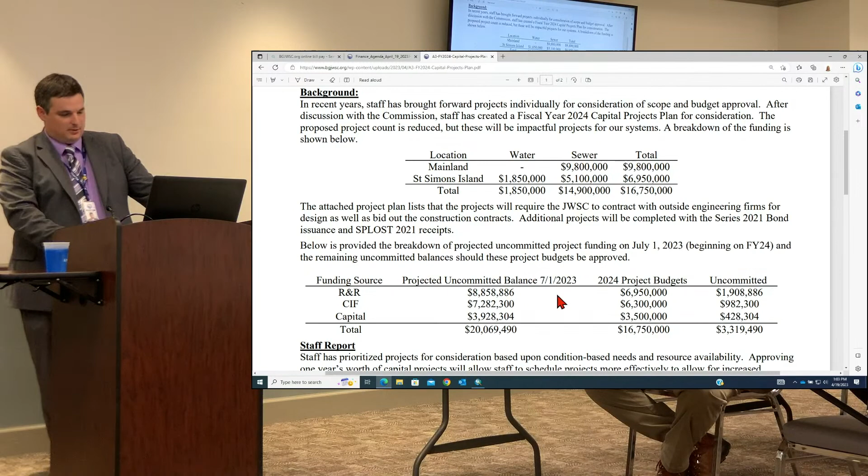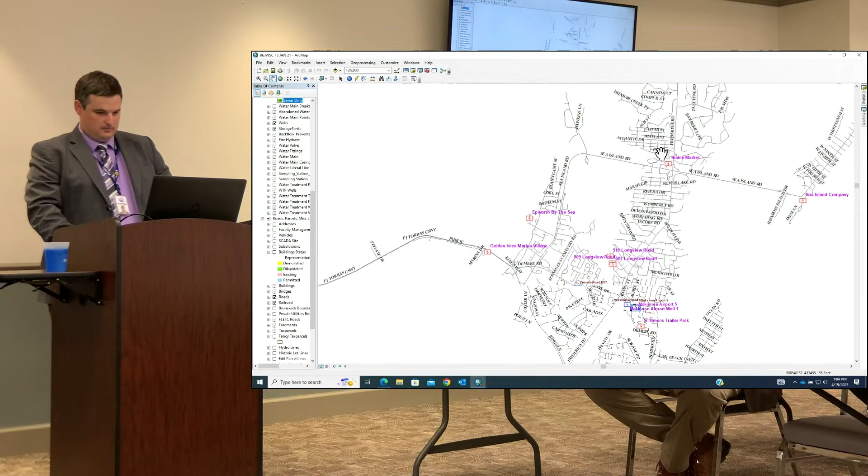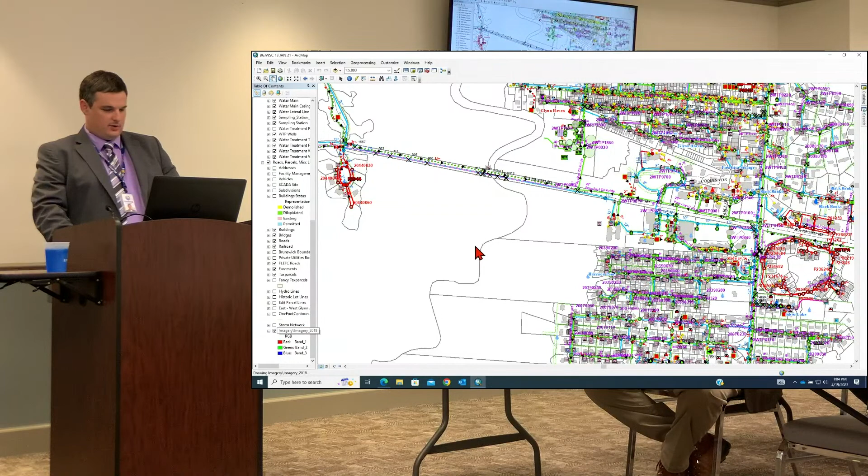The first project here, funded by the R&R, is Dunbar Creek Water Pollution Control Facility clarifier improvements. I've got GIS pulled up here so we can zoom in on these areas and discuss as necessary. I want to put these pictures on here so everybody knows where we're at. The plan for Dunbar Creek: we have an existing contract right now with a design build team working at the plant site to do improvements to the UV filters, aeration basins, and odor control at the facility. They are also making improvements to the roadway off of Sea Island so that becomes the main entrance.

The request here is to add a third clarifier to the Dunbar Creek plant for a couple of reasons. One, that allows us to do maintenance on the existing clarifiers—pulling it down to 1 clarifier is a struggle for us right now—and also, should the need arise, it will allow us to increase capacity at Dunbar Creek. But to do that is not just adding the clarifier; we will be filling in a portion of this pond to reroute the entrance road a bit, so that will allow for a full 80-foot diameter clarifier to be installed here. So that is all included together.

I have a question on the clarifier.

Somebody's having a good time.

Are the new ones significantly different in design than the older ones, or do they all function basically the same way?

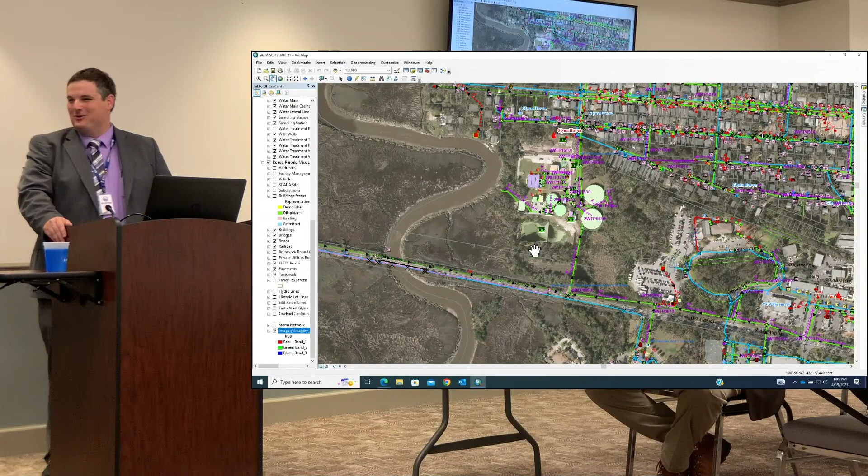I'll let the chairman add anything he wants, but I think the clarifier designs haven't changed a lot in the past 20 years. That clarifier is also necessary to increase capacity to 5 million gallons a day. Oh yeah, I know we need that.

All right, the second project is an R&R project called out in the master plan. It's keeping up with those master plan projects: pump station 2001 and 2002 rehab. When we do rehab projects for pump stations, we find we get better pricing and typically better interest in the project when we lump a couple of them together.

2001 is on Lord Avenue behind the village. It's a smaller pump station, but needs electrical replacement, safety grating at the wet wells, and some minor improvements. Pump station 2002 is on Arnold Road. We just replaced the force main there earlier this year. It also needs complete electrical replacement, new discharge piping and valves, and recoating the wet well for corrosion protection. Neither station will get an increase in capacity.

That's just rehab-based work. Are these ones we're engineering in-house? Pump station 2001 and 2002, we'll do the engineering in-house for everything but the electrical. We'll sub out the electrical engineering, but we have a standard electrical design now, so it should be mostly short-term to get that work done.

Harrington, Airport, and Mallory Water Production Facility are 3 of the 4 well sites on St. Simons Island. The master plan called out that they needed complete electrical replacements. The electrical there is 30 to 40 years old. There's a ceiling repair needed at Harrington, and we need a new finished water meter at Harrington.

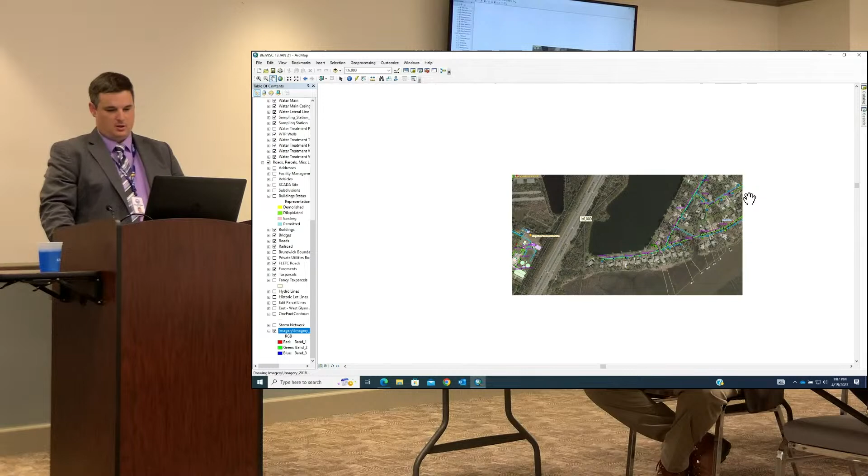Then 2 major projects at the end here. The capital project I was speaking about, proposing to use funding we haven't used before, is pump station 3103, located in the Royal Oaks subdivision at exit 29. Currently, pump station 3103, right here on the side of 17, pumps down 17 and then goes underneath I-95, discharging into a gravity line near the travel center. That station needs flow increases due to increased development upstream, both from commercial development and development at the Georgia Ports Authority. So we have multiple options on what we can do here.

What is currently being proposed, and will be considered as part of preliminary engineering when we send this out, is whether we increase the size of flow on the existing force main. Flow is currently limited on the force main, which I believe is a 6-inch force main. Or, we could reroute the force main through the Royal Oaks neighborhood and bore under the interstate again, coming into the plant, which would shorten the piping distance and reroute that flow off of pump station 3101, which currently has to repump all that flow.

A third option is a hybrid approach, which would continue to pump some of the flow the original way and pump half the flow back through the neighborhood, upgrading pump station 3104 as part of that and repumping from there. So those are the 3 options we can consider once we get an engineer selected, based on life cycle cost and upfront construction costs, to determine the best approach.

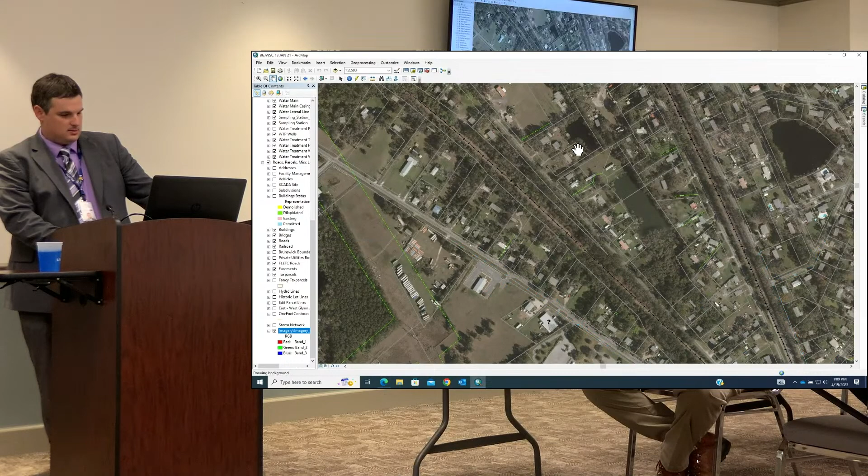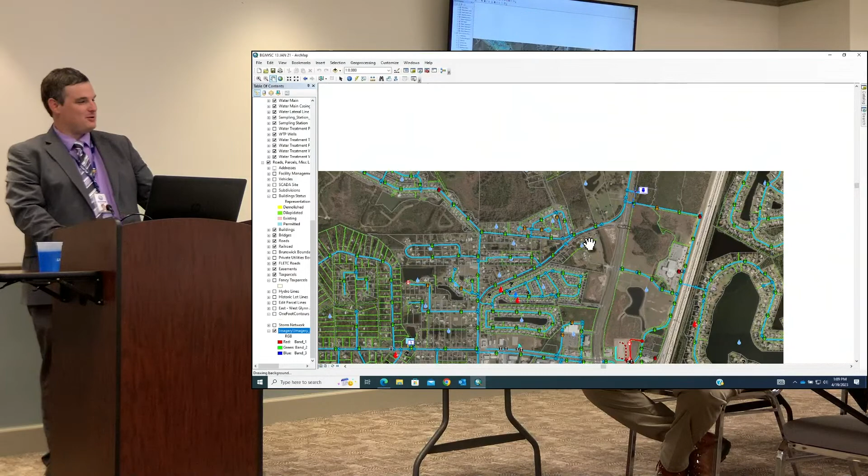It is located at the intersection of the spur and Highway 99. If you have driven down Highway 99 in recent years, you have seen an explosion in residential housing development along that corridor. We also know the proposed Buc-ee's installation will bring additional development.

Pump station 4119 is located right here. Currently, it has a force main that runs down to the existing Gateway Tract property owned by the Development Authority, then goes gravity underneath the interstate, flows through this very swampy area in the back, and then into pump station 4118, located at the end of Shell Road, across from the Morningstar facility.

It's then pumped down Shell Road to pump station 4110, which we just completed the major improvement project for that force main. What is being proposed, since we're force main limited in what we can do without significantly increasing the horsepower at the station, is to install a new force main bypassing this existing gravity line along the Highway 99 corridor, come back underneath the interstate, and tie in directly at pump station 4118.

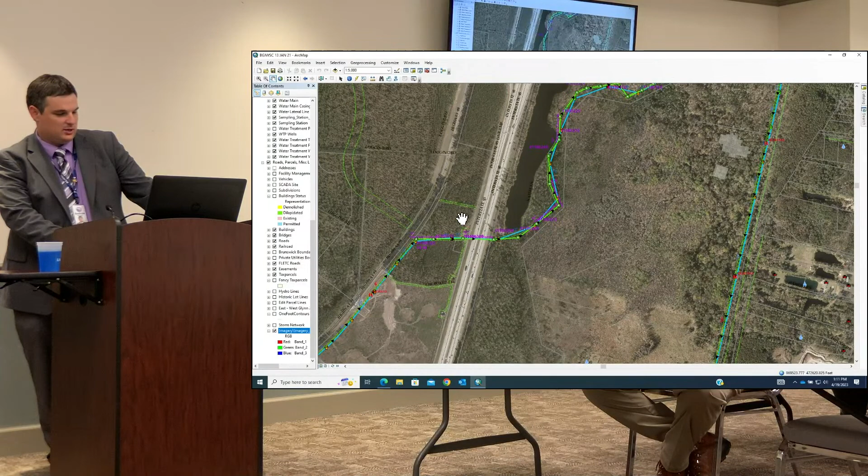Now, what that will do is two things. One, it will eliminate the need to use this smaller force main. It also opens up this gravity section to take additional flow from potential industrial development opportunities at the Gateway Tract, and Trade Winds, which are also development opportunities back here behind the proposed Buc-ee's.

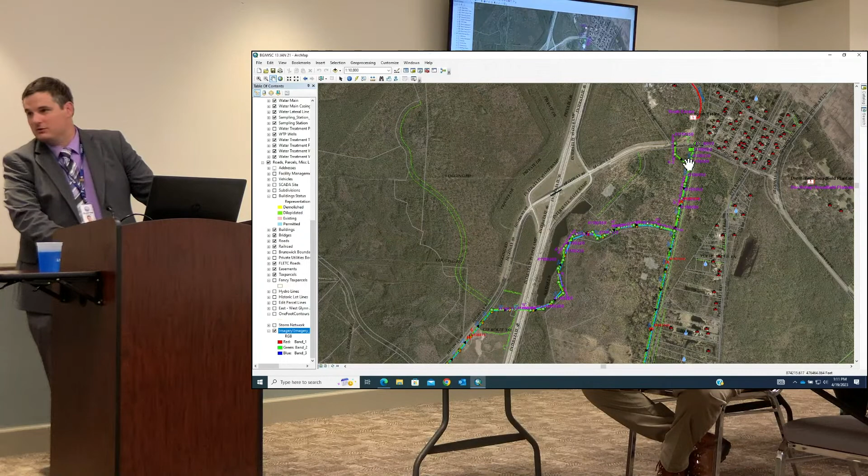But if we get the force main in the ground here, when we look at constructing the Exit 42 wastewater facility, which hopefully we'll begin engineering on in the near future in this northwest quadrant of Exit 42, the pipe that is put in the ground can be used to change the direction of pump station 4118 at a later date and pump back through it, so that flow can be taken off the Academy Creek plant and put to the new facility.

Now, that is a very expensive project. It is approximately the same amount of pipe that we installed with the SPLOST project from the North Mainland down Harry Driggers—a little bit smaller pipe, but about the same length. We'll also have to do improvements to the pump station to increase the flow. Currently there's about 950 gallons per minute of capacity, and we'll be going to 1,500 gallons per minute with this project. That will require extensive engineering as well.

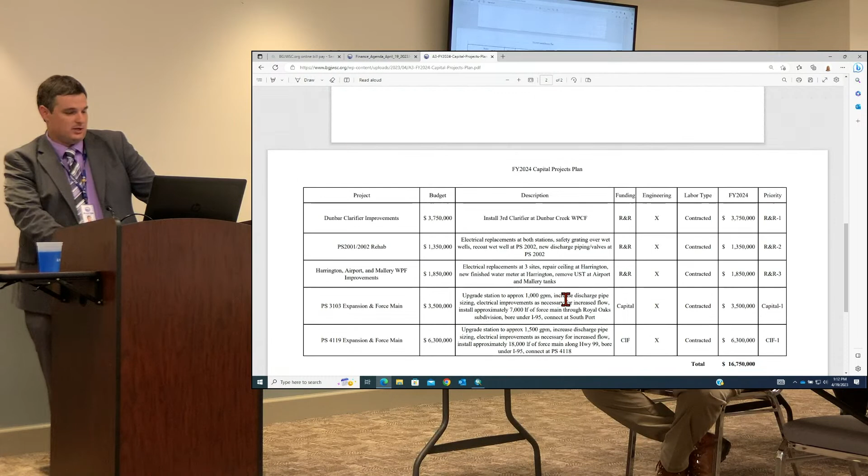So the only ones that will be completed in-house are the civil and mechanical design for pump stations 2001 and 2002. Mr. Chairman, I'll move the Facilities Committee recommend the full commission approve the fiscal year 2024 capital project plan as presented. I'll second the motion.

Motion seconded, any questions? I have a couple, if you don't mind. So Andrew, like the Dunbar clarifiers, I think of that as a construction project that you're going to hire some kind of general contractor to manage.

When I look at pump station 2001 and 2002, I really see kind of two different projects. One's an electrical scope and one's more of a mechanical/concrete scope. I wonder, on scopes like that, would it be more efficient to have two totally separate projects, even if they're not done at the same time? Because I see them as mutually exclusive, though I might be wrong based on the operations of the pump station.

I wonder if instead of hiring an electrical engineer to go out and design an electrical system basically for a pump, is that the most efficient use of dollars, or would we be better off approaching electrical contractors and having them do a design-bid, saying, do a replacement of this system for us, give us proposals on how you would do so. In my experience, local electrical contractors are very good at looking at electrical distribution systems and saying here's how we'd upgrade this, here's how we'd replace it, without going through the expense, the time, and the gold-plating that engineers like to do at times.

It could be done, we've never done that. We could consider doing that, and we'll have to confirm that we're following the appropriate bid laws to make sure that we can do that.

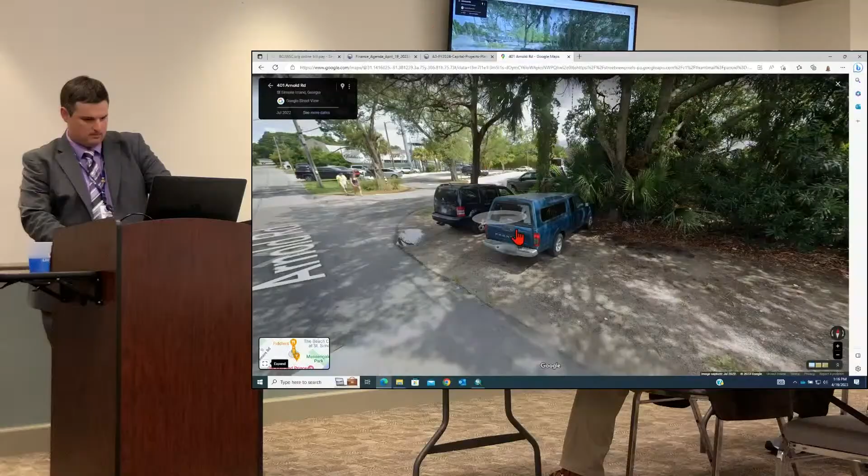Second and third, 2002, it's located on Arnold Road, right beside Fiddler's. It's on the same side as Fiddler's too, right? Yes sir. Well, there it is. It's a control panel and everything's raised there. Yes sir, because it's right there on the marsh.

I'll be honest, we've gotten multiple quotes in on pump stations, and electrical replacements on pump stations are going for $300,000 to $400,000 right now. It used to be that you could build a whole pump station for that - $250,000 to build it. Now you're looking at $300,000 to $400,000 just to replace the electrical. Wow.

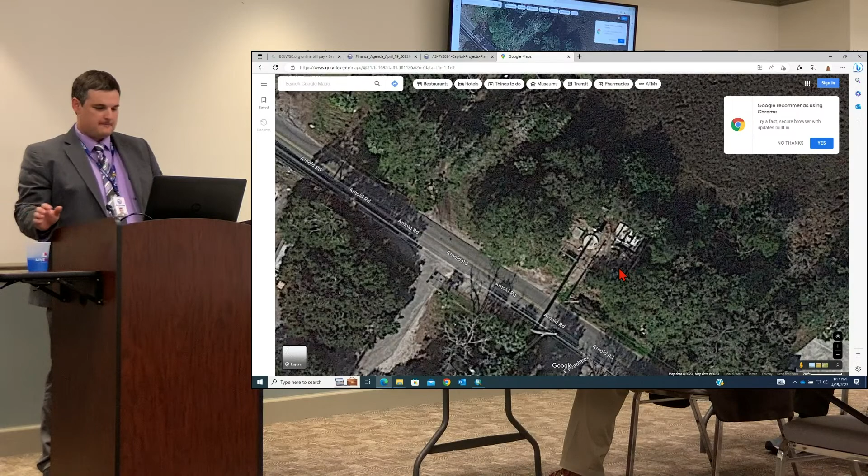Can you pull up the water production facilities? Sure. Airport well is right here. Explain to us what's gonna be done there.

We're going to basically go into this building and gut the electrical systems, according to the master plan inspections that were done by the electrical engineer. They've reached the end of their useful life. There will be complete replacement of motor control centers, breakers, VFDs, the whole nine yards on those pumps. And then there's an underground storage tank that will be removed - it's diesel storage for the generator. The generators we're getting through the FEMA contract have belly tanks on them, so we no longer need that. When you have an underground storage tank, if it's over a certain quantity - it's a very small quantity - you essentially have to do the same testing that a gas station has to do every so often to make sure the tanks are not leaking.

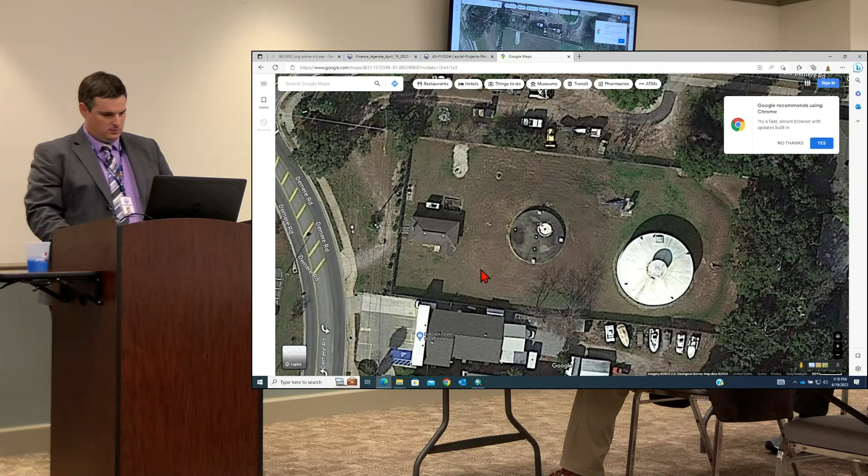Point out where the wells are there, Andrew, and explain what we've got there. All right, this picture is terrible. So this is the ground storage tank, that's the air stack aerator on top, a plate aerator where we drop across. Well facility here, and then the remote well.

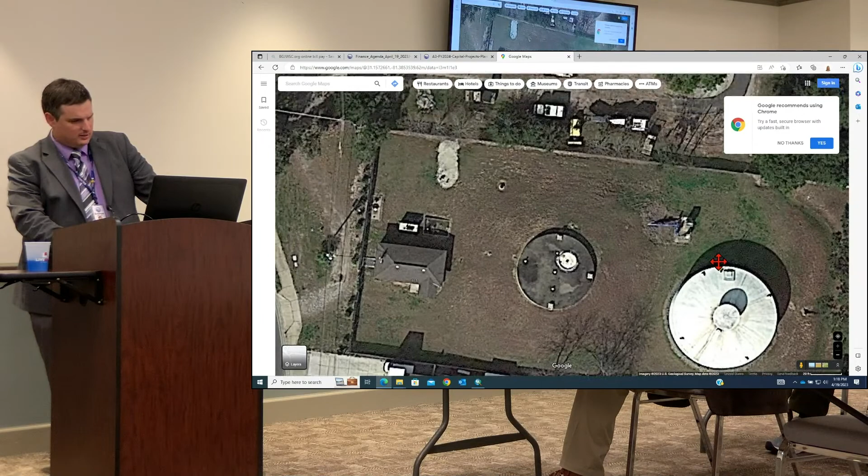Do you know where it's at? Yeah, it's on the other side, up where they have the little farmer's garden kind of thing. Ah, yes. There's a remote well facility here, so we actually have 2 wells that pump to this facility.

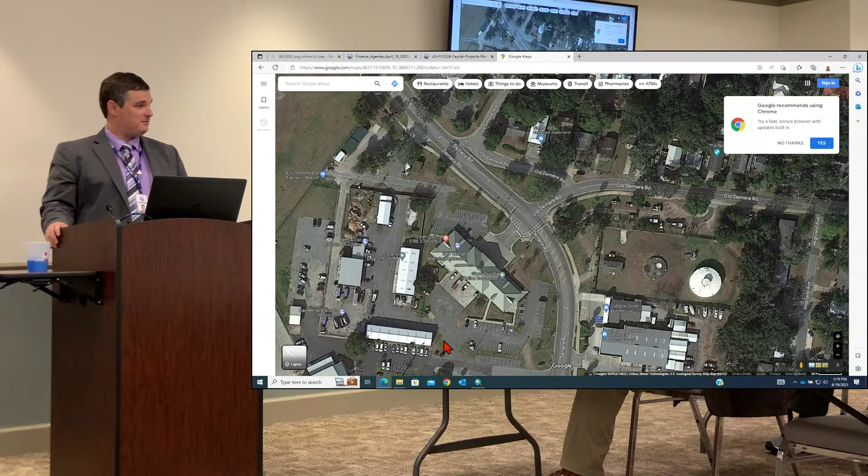So this is one of the older well sites we have currently in use. I believe it was put in the 40s or 50s, so it's a small tank.

Mallery Street well - well, not too far, I'll get there in a minute. Demere - I went too far again. There we go.

Right here, right there on the side of the road. There it is, same setup, much smaller footprint. Ground storage tank, pump building with electrical.

We'll be gutting the electrical here too, also removing an underground storage tank for the fuel. And the last one is the Harrington facility.

Go back to Mallery. Yes, sir, it's right in the neighborhood. And that tank has always got mold on it. We're looking at ways we can use some type of additive to the paint that prevents that from occurring. We have pressure washed it repeatedly, and then within a month it's right back to where it was at.

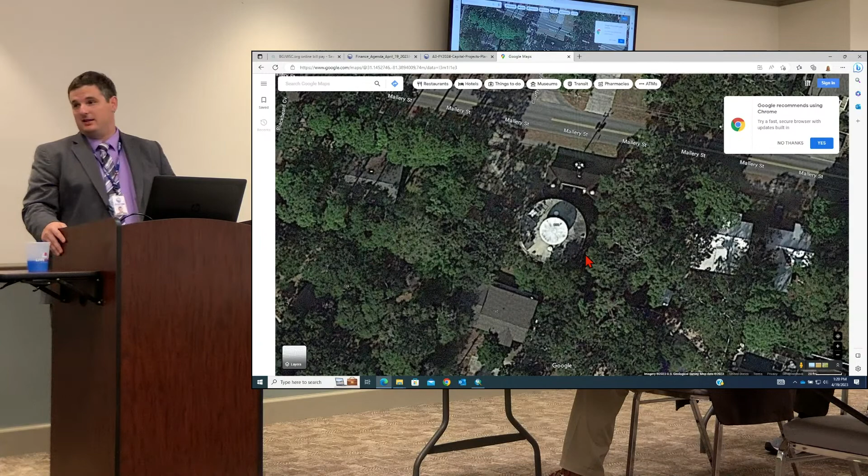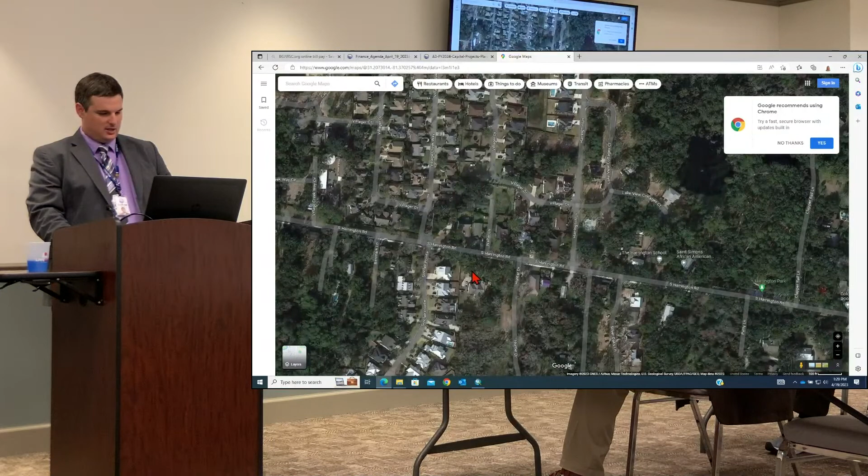And then the Harrington facility is immediately adjacent to where Derek Simmons and the water distribution crews work out of. So this is Derek's building here.

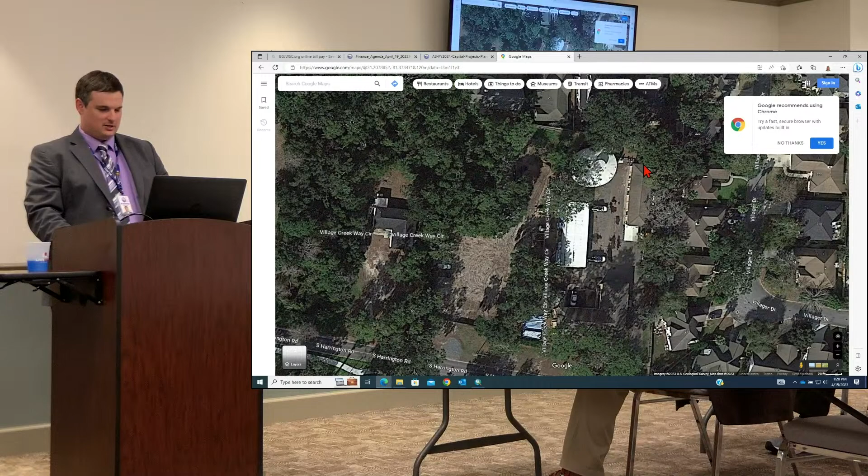This is Derek's building here. This is the warehouse, and this is the ground storage tank for the Harrington facility. And this is the pumping building. It's got the high service pumps and the electrical panels.

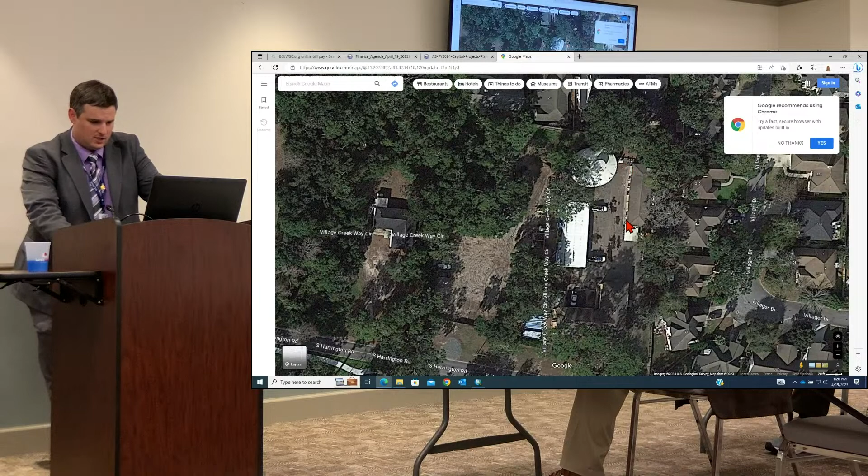There's a ceiling repair that needs to be done in there. And so this one's right there off of South Harrington. Again, these were listed as high priority projects in the master plan in the first 5 years of that.

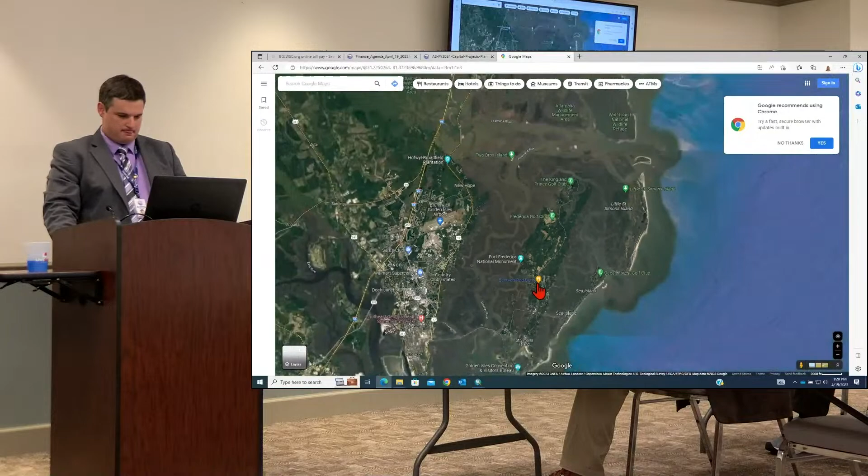So you showed us the force main and showed us those. Yes, so the 3103 and 4119 projects are expansion-driven projects. We've got a lot of increased growth in those areas, residential and commercial, and then also at the port.

At exit 29, these are good projects where we're not just putting in enough capacity for immediate needs, we're putting in a little extra to allow a buffer, and that will serve us well for many years to come.

Are there any other questions? Hearing none, all in favor? We can go ahead and vote. Okay, 2-0. Motion carries.

Next item is the Dunbar Creek Water Pollution Control Facility Change Order Number 2.

Mr. Burrs? Yes, sir. As I updated you a couple of months ago, at the Dunbar Creek facility, the 30-inch influent sewer collapsed between the manhole and the influent wet well.

We had a small section collapse previously that we change ordered to BRW for $101,702.69. Another section of the line collapsed, so we made the recommendation to go ahead and replace all of that pipe moving in, which has been completed.

With the design build process, we get open book pricing where they provide backup receipts for every dollar that is spent, plus we have a guaranteed markup rate for the overhead and markup rate that they put on it.

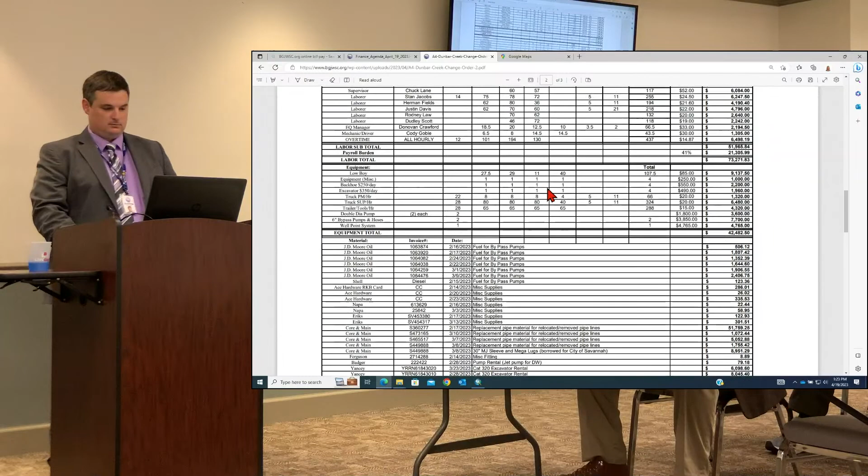Can I have a motion? I'll move the Facilities Committee recommend the full commission approve change order number 2 in the amount of $340,049.48 to BRW Construction Group LLC for scope changes associated with the Dunbar Creek Water Pollution Control Facility Rehab Project. I'll second. Motion seconded. Any questions?

Drew, I noticed there's a lot of equipment rentals on here and stuff, just a general comment that I think we should go back annually and look at total equipment rental that we do, and then see if there's opportunities where we would've been better off just buying equipment, housing it, and having it available even if it's for contractor use. Not that we want to get into the equipment rental business, but if we're renting pumps consecutively at a cost annually of what we could've bought a pump for.

Sure. And then ultimately we get the benefit of having that available for our emergencies as well. Yes, sir.

Any other questions, comments? Hearing none, all in favor? Motion carries 3-0.

Next item is contract awards, plus exit 29 water pollution, water production facility and elevated storage tank engineering. Mr. Burrs?

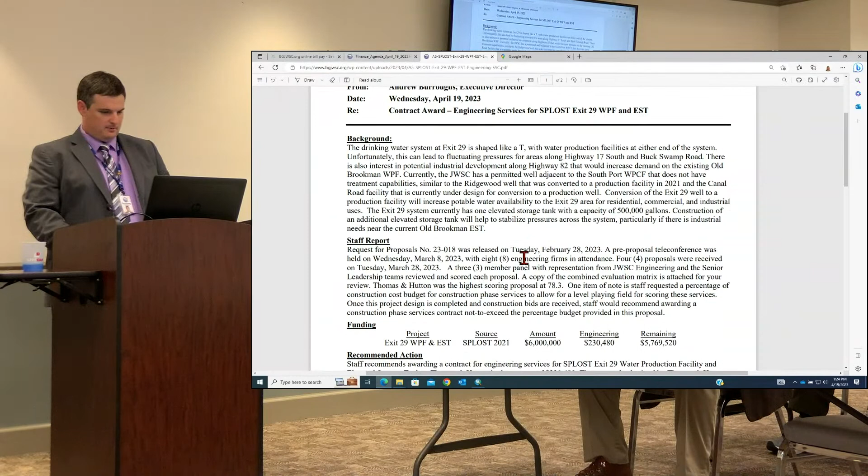Yes, sir. As you are aware, SPLOST 21 collections began April 1st. So we put out an RFP, February 28th, and collected proposals March 28th. We had 4 proposals received.

We had a 3-member panel score the proposals from both engineering and senior leadership. Of the 4 proposals, the highest scoring firm was Thomas & Hutton with an average score proposal of 78.3.

One thing we've done differently here compared to our traditional engineering contract was, instead of asking for a hard dollar budget for construction phase services for inspection and construction administration, we asked for a percentage of construction cost budget. So that is not being awarded at this time.

The request is to award the design budget, and then once the project is bid out, we will come back to you with a proposal from them not to exceed the amount budgeted here in the proposals received for that construction phase services.

The SPLOST 2021 budget for this project, which is to convert a well site into a production facility and install a 500,000 gallon elevated storage facility at exit 29, is originally budgeted at $6 million. The engineering design is $230,480. You see the scoring sheet here, which we'll go over shortly.

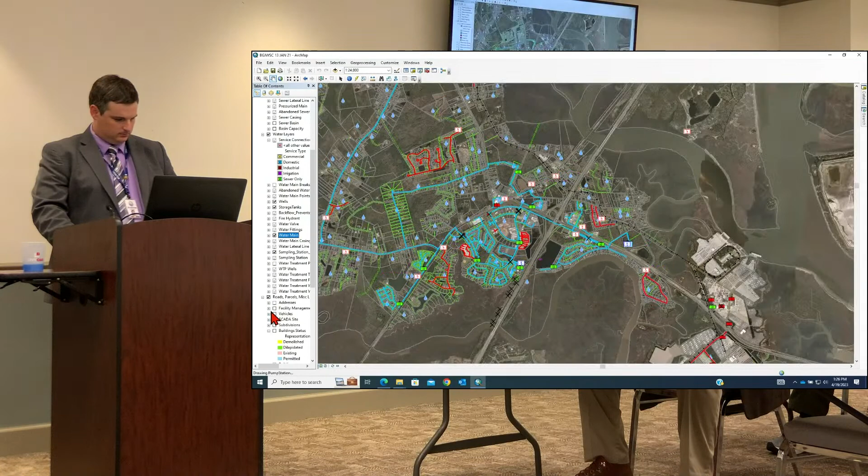But let me explain the real reason we need to do this project. Let's see, water main... One thing you will notice on this system, we currently have 3 wells on the permit.

2 of them are in use currently. With the old Brookman well up here at the very far end of our system, there's an elevated storage tank. The other well that we currently use is the Fancy Bluff well, out across from Royal Oaks, that we just talked about with pump station 3103. So the well sites we have currently in use are at either end of the system.

The exit 29 well that would be converted is currently, the well has been examined. It will function. We just need to add treatment capacity, ground storage tank, and chemicals there. It's right here on a property adjacent to the existing exit 29 wastewater treatment facility.

We have intermittent pressure issues in neighborhoods around Clearwater and also along Buck Swamp Road for some of these neighborhoods, because all the water is being pushed from either end of the T up here, and this end is kind of left in the middle. So the hope here is to construct an elevated storage tank adjacent to the well site, which will help stabilize pressures in this general region.

Another thing to keep in mind, the Development Authority now owns the old Dean's Island tract, which is a 1,200 acre industrial site that they are marketing for industrial use. The old Brookman facility, which is the only current elevated storage tank at exit 29, is stubbed out to the property line at Dean's Island.

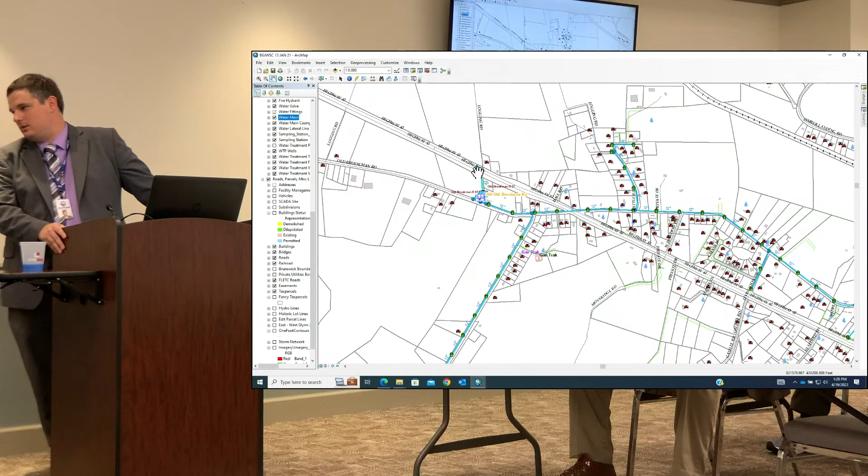So if something were to come in there, which we are hopefully getting interest in with the Hyundai suppliers and types that are coming into our region, that would put a tremendous strain on the old Brookman tank to maintain pressures throughout the rest of the system.

So this is a good planning project for us, and then we'll have an elevated storage tank here adjacent to the wastewater plant that's kind of bookending our county. When you come into Glynn County, we'll have a water tank on one end. We have the other project to put a water tank at exit 42. It'd be a good signpost for us to say that we're open for business in Glynn County.

Let's see here, scoring, we did a little differently this time. We asked for a little more detailed information to try to make sure we were getting to the right conclusion. So we asked for 2 similar projects, including the conceptual layouts for the projects that were completed. We asked for projects that had been designed and constructed and were in use. We also had references provided outside of that, we called references and actually interviewed the people that had worked with the engineers before.

We scored them based off of 6 key team members for the project, and each individual team member got a score. We asked for detailed information on their approach to managing the budget and cost estimation, which we know right now is somewhat a shot in the dark, but we wanted to know their experiences and how they proposed to handle escalating costs.

How they ensured quality assurance and quality control of their projects so that we don't have errors that end up occurring and having to be corrected in the field.

Project timelines is a major concern. We know that a lot of our projects are behind schedule right now. We want to make sure this project, being a SPLOST project, stays on time.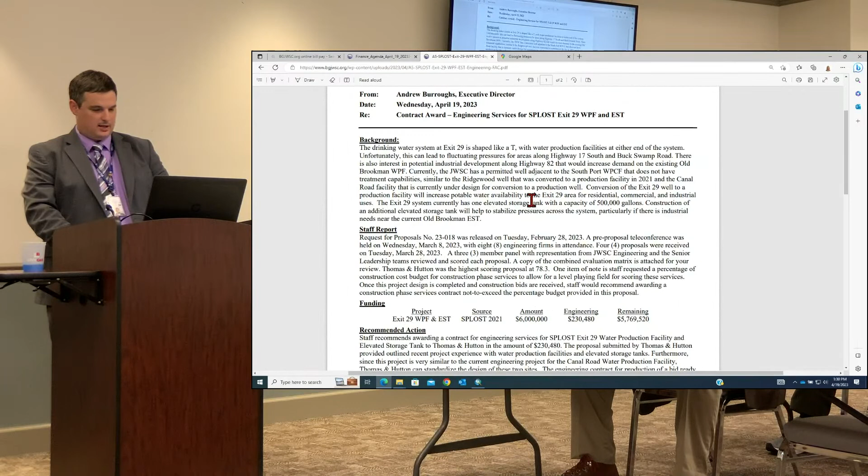So the highest scoring proposal was Thomas & Hutton. Thomas & Hutton is doing the design on the Canal Road facility that is currently under design. It's a very similar project. The only difference with this project is the design of the elevated storage tank.

They did have recent project experience designing elevated storage tanks. They've got the project experience with the Canal Road well. And we expect this to be a quicker project than some of the other ones because a lot of the similar design principles can be used. It looks like they were the cheapest too. They were, yes sir.

Can I have a motion? I'll move that the Facilities Committee recommend that the full commission award a contract in the amount of $230,480 to Thomas & Hutton for engineering services for the SPLOST Exit 29 water production facility and elevated storage tank project. I'll second.

Motion is seconded. Any questions? I have a couple of questions. I think one of the things is, we sit here and deal with a lot of technical things, but if you were an outside person, just a customer, a project like this, the SPLOST project, allows us to push this ahead of where it would normally be in our rotation.

Is that correct? Yes, sir. For us to fund a $6 million project, you're not going to fund many of those in a budget. So this is a good project for the community to increase water availability in the Exit 29 area and also stabilize pressures, which is a big deal for folks.

And I think that's important because most people, end users, turn on the tap and they don't think about any of the process that goes on. So it's very important, I think, that people realize the thought and planning that's gone into this.

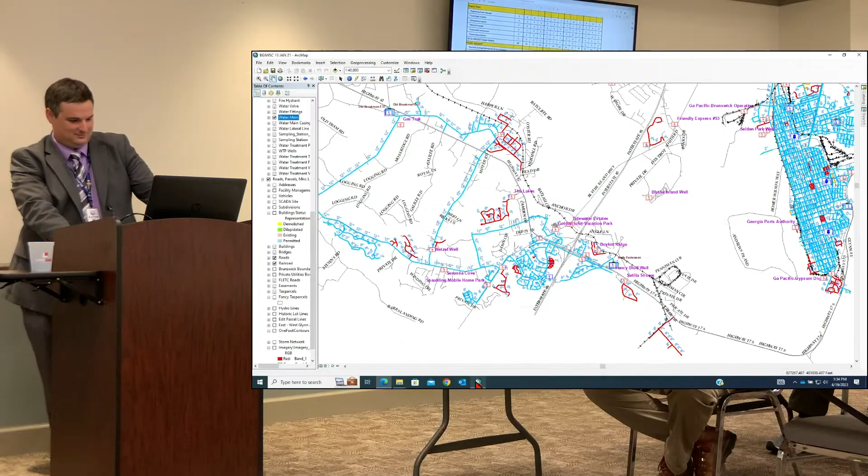None of that should be an issue on this project. Can you pull up the Southport wastewater plant and show us where the well is? Sure, on Google Earth so we can talk about something. Y'all know where the Southport plant is?

This is the Southport plant adjacent to I-95. Barely see it from the interstate. Show us where the well is. The well is right here. And where is the elevated tank gonna go?

We have two options for the elevated tank. We can either locate it here on the wastewater site, right beside the wastewater plant and the elevated storage tank, or there may be an avenue to locate it over here in this area. There are some wetlands in this area, but we think we can probably get it in over there. So we've got two options, with similar benefits to both locations.

We own this property here all the way back out to Southport Parkway. We're looking at rerouting a force main through here already, so it may get a little crowded. We're going to try to make it work over here, but if not, we'll have plenty of space to put it in over here.

But visible from the interstate? Either way, it's going to be adjacent to the interstate. Right.

And that well, will it require a well house too, or just a very small well house? It'll be very similar to what we put in at Ridgewood. The building would be very similar to what we're going to get here.

It has to be that even though we have a big control building at the wastewater plant? I think we want to separate all that. The water people don't like working with the sewage, exactly.

I will say, as a compliment, 100% compliment to the wastewater plant here - this is an elementary school, Satilla Marsh Elementary. I was there a couple weeks ago chatting with somebody about a STEM opportunity, and they were talking about STEM for children, and I said we could even get you a tour of the wastewater plant.

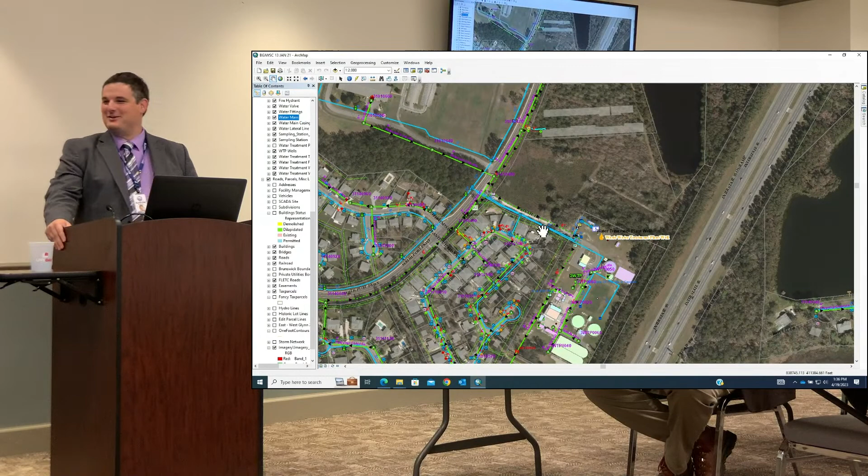Well, this is the entrance - there's a U-shaped entrance to the facility here for the school. This is the entrance to the wastewater plant. Nobody I talked to actually knew there was a wastewater plant back there. And that's the highest compliment you can give a wastewater plant - that I didn't know it was there. So well done by the facility there, making sure nobody knows that they're back there.

Now, is that gonna require a line going underneath the highway eventually? No, sir, we could eventually do that, but we weren't planning on that.

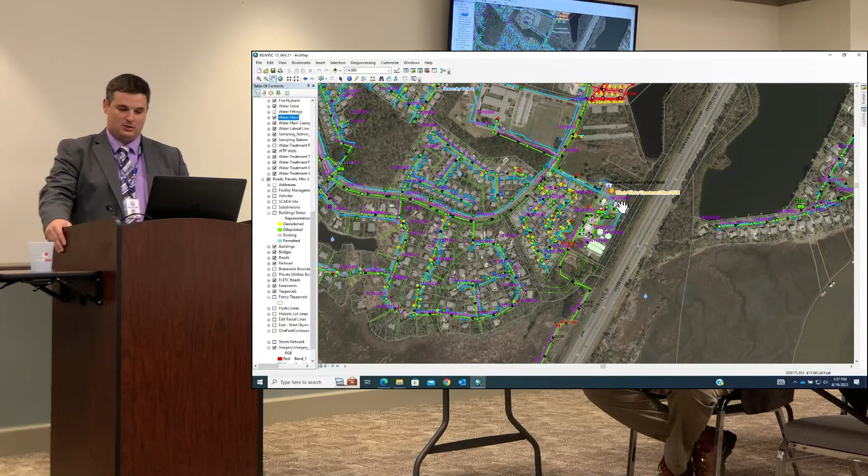We were also going to loop in these neighborhoods here because they're single fed. So we were going to try to loop in some of these neighborhoods to the tank as well. But on that pump station we're talking about, we could put two casings in at the same time, get it together and be ready to go. Yes, sir, it's a really good idea.

Did they say how long it's gonna take them to do the work? Trying to be cognizant of everybody's workload, we allowed a time of up to 330 days for design for a bid-ready package. Thomas & Hutton assures us they will be done much sooner than that because they can use similar designs of what they've already got working.

Any other questions? I will say, once this goes to construction, you're probably looking at 18 months to get this project constructed because of the elevated storage tank.

Any other questions? All in favor? Motion carries 3-0.

Next item is contract award for Highway 341 Crispin Boulevard repairs.

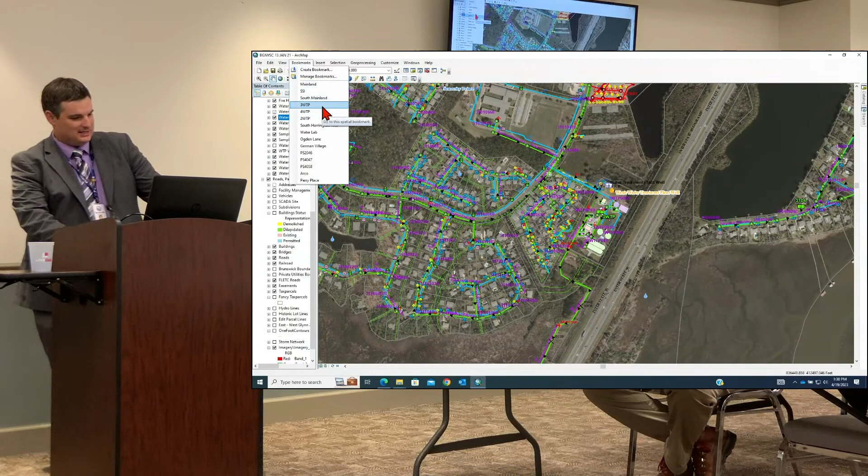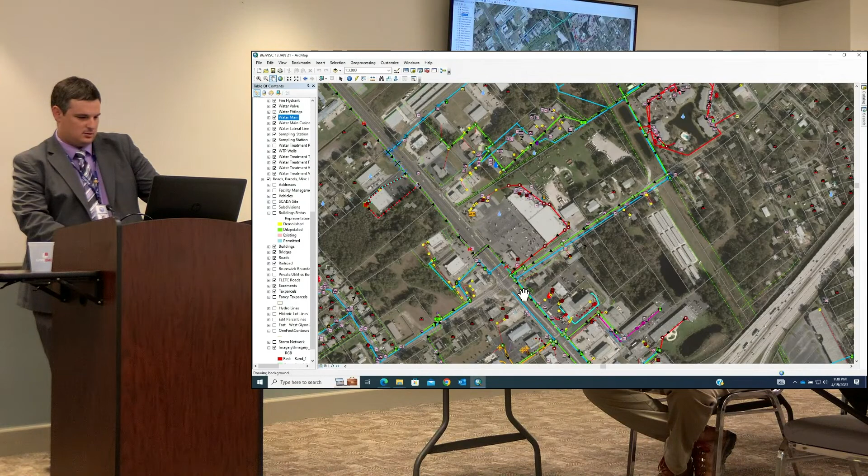Let me orient us here on Highway 341 in Crispin. If you've driven the Highway 341 Crispin area, you have undoubtedly seen road plates up there. There has been a partial collapse of a sewer main. The line is still flowing, right here at this intersection. The Google car was in town, so this section between this manhole and this manhole has a partial collapse of this line that is flowing.

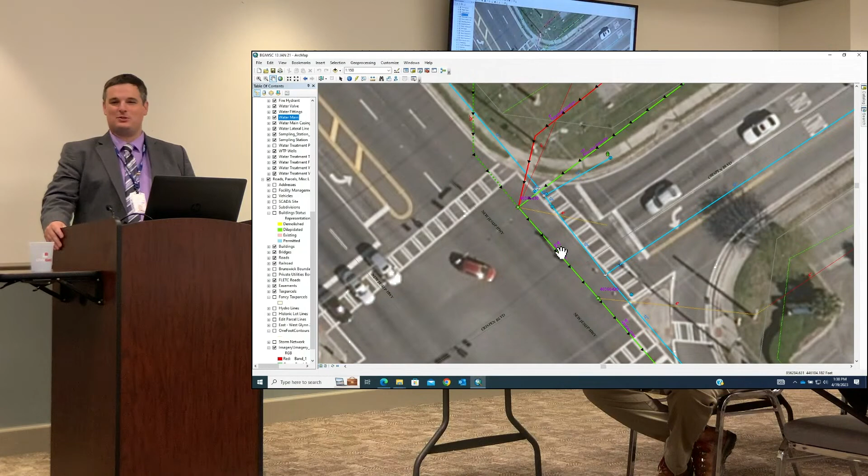To make matters substantially more complicated, this is in the travel lane of Highway 341. There are two 36-inch RCP storm sewer lines across the top of this pipe, and two force mains that come into this manhole. This is one of the most challenging sections of pipe we have to deal with in our system.

We have contacted multiple construction firms asking for pricing, and we have finally received 2 proposals. 5 people declined to give us a proposal, indicating that was not something they were interested in taking on right now. It's a 60-foot section of 18-inch ductile iron piping, with force main discharge and extensive traffic control required. The 2 proposals submitted are essentially the same proposal because the work will have to be done.

The work we're going to get done trenchlessly to avoid having to support those 36-inch RCP lines. But to do that, you have to dig down and get entry pits and also do bypassing, traffic control, and everything. So there's a CIPP contractor and there's a standard civil contractor.

We got proposals from both of them, so the decision here was simply who's going to be the prime contractor. We decided to move forward with Popco Inc. as the prime contractor at $679,000. The proposal from Bionomics included an additional management fee for them to manage the project, so we're avoiding that cost. This is a substantially higher price than what we would typically pay to repair a 60-foot section of pipe.

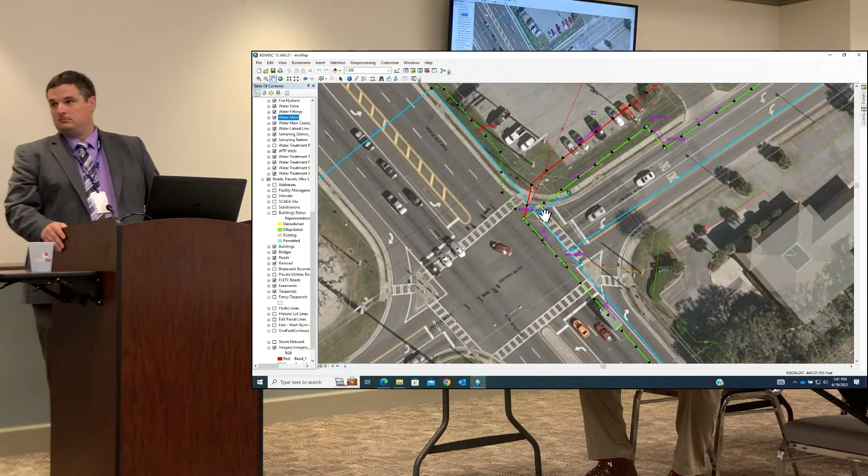And likely a single lane closure on 341. So we're replacing a manhole? No, sir. We are, but the manhole has two force mains coming into it. What we're going to do is, we will be rehabbing that manhole once we get it together. We're likely going to have to remove a couple of the upper sections of the manholes to make sure we can get in there and do the work properly.

Pointing the area, bypassing is going to be an extreme challenge. And then traffic control is also much more expensive than would typically be required. We have talked to GDOT, and we are going to be required to pave 50 feet in every direction of the section. So the paving cost is also much higher than what you would typically see for a standard sewer repair of 60 feet.

They know what we're going to be doing and they've given us the permit? They haven't given us the permit, but they're aware of the situation, yes, sir. And they are very much pushing us to get this corrected.

So it's an emergency. Sounds like it's only going to take 30 to 45 days for completion, right? Once you add 30 to 45 days for completion, they ask for at least 2 weeks to mobilize, so we're looking closer to 60 days probably for final completion.

The bypassing, is that rented equipment, or is that theirs? Well, I don't know if they're renting it or bringing it. It's there with their equipment. Whether they're renting it or not, I'm not sure.

Again, I just want to point out, if we've got that kind of stuff that we own, and $115,000, I realize there's probably labor in there too, and a lot of that is labor. But if half of that, just making up a number, is equipment, that's a big down payment on us owning the equipment. And my perception at least is that we have a lot of those things we're renting, and there's no doubt we can't build a church for Easter Sunday, but at least if we had a core group of equipment that we owned and could provide the contractors to do our own bypassing, it would help us have that equipment for when we needed it, and help pay for the equipment when we needed it versus going to a rental company.

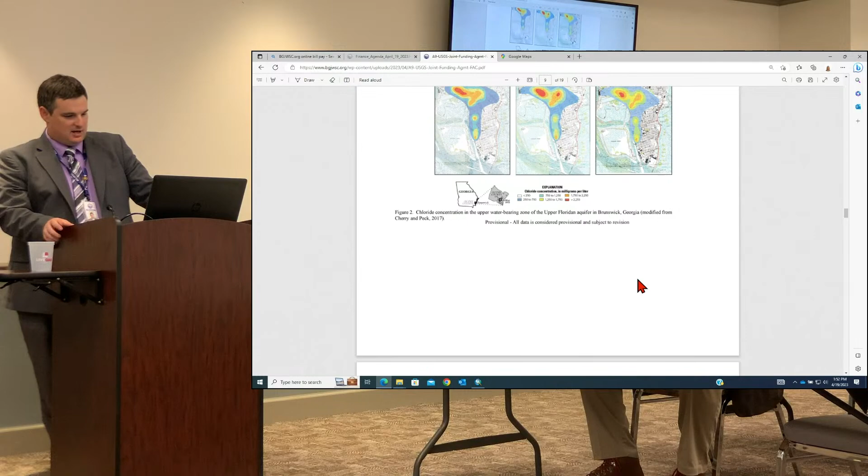But you can see the monitoring wells and how the plume has developed. The one thing I will note is in June 2000, you see the bright red and the orange here, and then it is seemingly stabilizing or maybe slightly improving in recent years. So continuing to monitor this is a good practice for us as stewards of the groundwater here. They have reached out to other large water users in our area to attempt to get offsets for our contribution, that have not been successful in recent years, but they're going to try again.

What's the acceptable level? I think it's 500, but don't quote me on that. I can get you the full report. It's 80 or 90 pages. I don't remember exactly what it is.

I was curious what the acceptable level of... Yeah, the ones now that we're paying the most attention to, Brunswick Cellulose is right here, which is, of course, the most closely one, and then the hospital's got a well here that they monitor, and then the Coffin Park well is near the hospital, and those are the 3 wells that we're paying the most attention to. The Coffin Park well is relatively close, but we haven't seen much of any kind of increase there, so ours is not domestic.

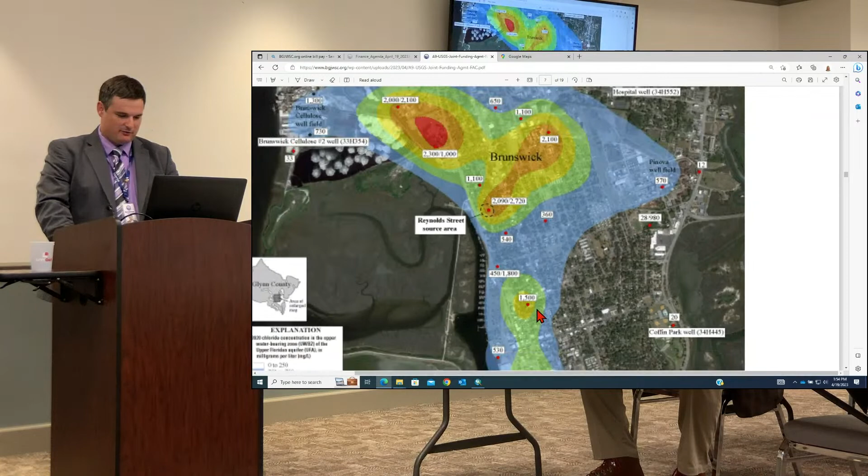Right, yeah, sure, but they just take groundwater samples from multiple wells. So is the blue acceptable for drinking water? Yes, okay, so it can be, that's the... we're trying to avoid the yellows, the oranges, and the reds. I'd just be curious to know what the acceptable threshold is for drinking water. I can get you that information, but I'm sorry, I just don't recall. Do we have anything in the green that we use right now?

There are no wells currently in use by the Joint Water and Sewer Commission that are inside the plume area. Because the only well that was inside the plume area is the Perry Park well, and it has been grouted shut.

Has the plume changed over the last... You can kind of see here on this page, if you look at this, the shape hasn't changed a whole lot, but you see some random spikes in different areas. Okay, 2015 is when we shut down the Perry Park well, because this red spike showed up here. And also, as we've grown as a community, it's grown away from the plume, so the new wells are helping that as well. And also, like I said, Brunswick Cellulose has, in the past 30 to 40 years, has cut their withdrawal in half.

So how are they, if there's no wells in that area, how are they taking samples in that area? They have a lot there. We don't have any wells, but they're taking groundwater samples from like 53 wells. There's actually a small groundwater sampling facility at Pump Station 4003 on K Street. We do not run a well there, but they have samples of groundwater all across the plume area. I got you, and those are shallow water wells, I assume? No, they go all the way to the Upper Floridan. Who put them in? USGS. Oh, they put them in specifically for it, okay.

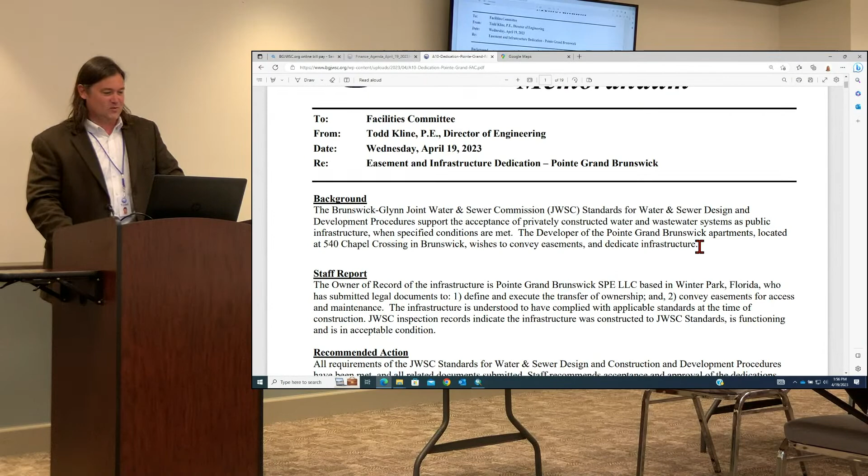You've got to help her, assume control here. All right, good afternoon, Commissioners. This is an easement infrastructure dedication item for Pointe Grand Brunswick, an apartment complex off of Chapel Crossing, north of the mall area.

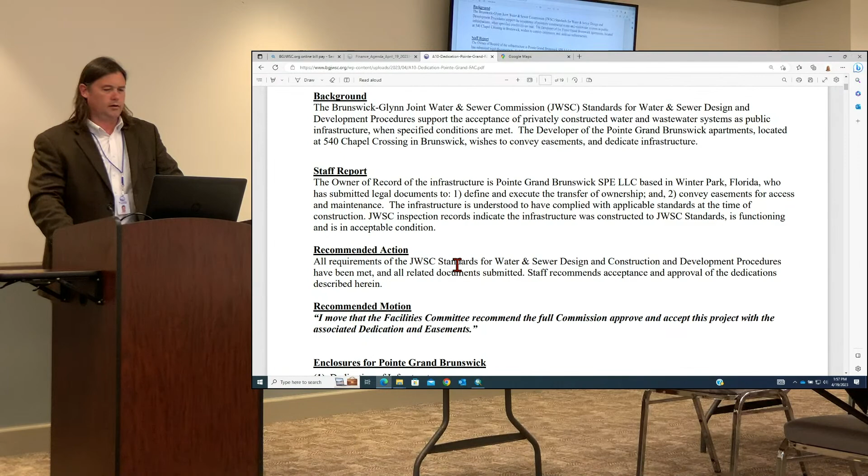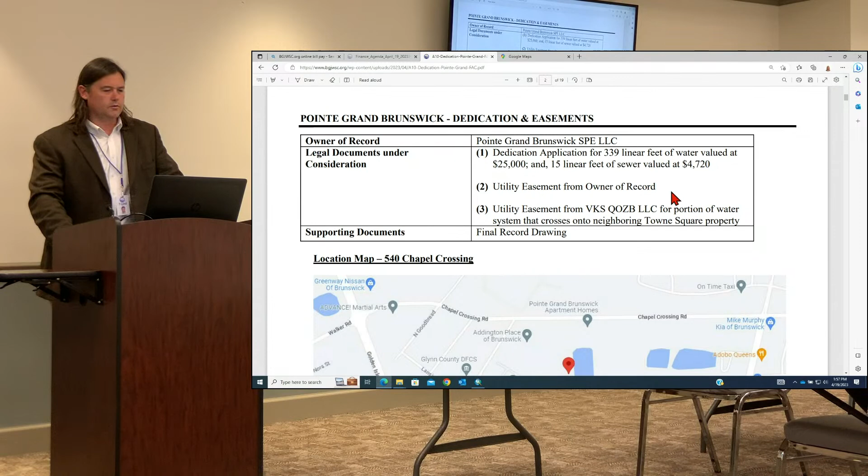As part of the dedication, it's not a lot of infrastructure, just enough for them to tie into our system. About 340 linear feet of water valued at $25,000, and 15 linear feet of sewer valued at around $4,800, plus a utility easement. There were 2 parcels that it crossed, which is why there are 2 utility easements associated with this.

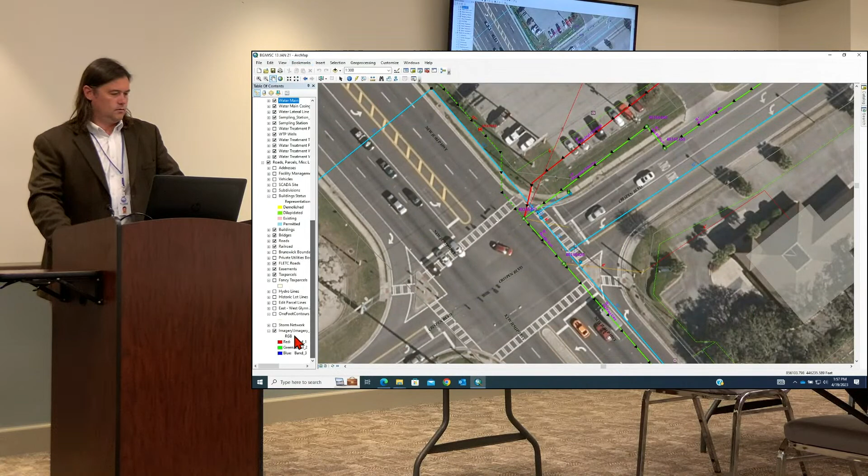And for... let me zoom in real quick here on GIS to show you the location. You're just going to see the apartments penciled in at this point.

So this is a new water line? Yes, sir, this is a new development, all private internal, which is why there are small portions of dedicated water and sewer lines associated with this.

There are actually 2 meters that are going to loop the system into ours. There's a meter up top, then a smaller meter down here at the southern end as well.

The crossing on Chapel Road, that's Chapel Crossing, is that also included? The water line crossing? Correct. Was that bored encased, or just bored across? It's just bored across. It's Glynn County, that's a county road, and Glynn County typically does not require us to case them.

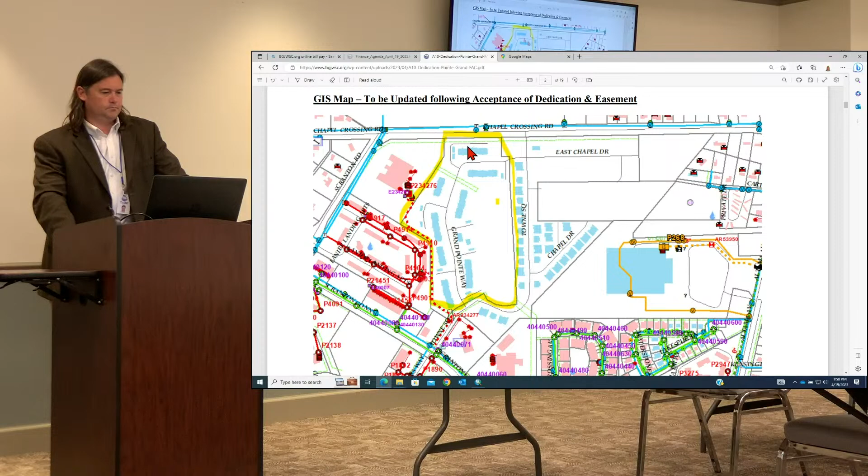I believe it's just bored straight across. And what kind of pipe is that? PVC, I'm assuming, right? And we inspected this while it was being put in, didn't we? Yes, sir, correct. It's private development, but as with all private development, it must still meet our standards, and it was inspected along the way.

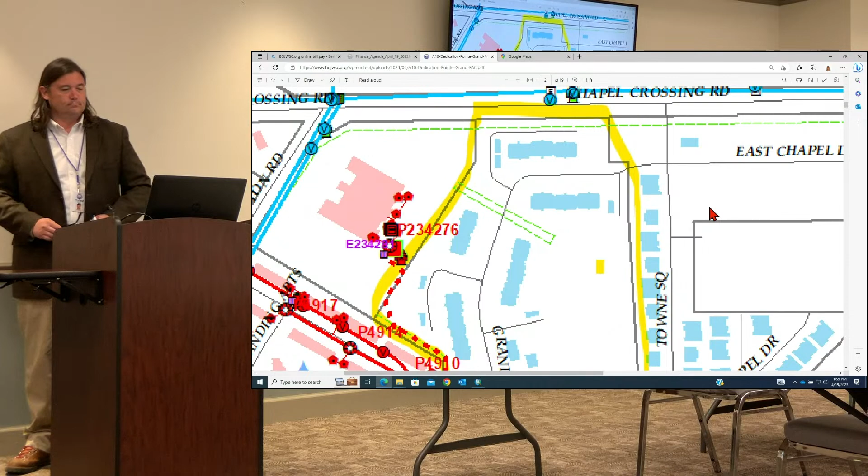Are they going to need additional water lines when they build the other part of the project there? Good question, Commissioner. Next door is Town Square, which is under construction now, with a few different phases. They'll be coming to us with additional pieces to connect and dedicate as well at that point.

Dedicated easement. I'll second the motion. Motion seconded. Any other questions? Hearing none, all in favor? Motion carries 3-0. Thank you.

We'll move to the discussion section of the meeting. Water production report, Mr. Burrs.

Yes, sir. Our water production report looks very similar to where it has for the last couple of months. Average monthly usage on the mainland for Brunswick is 5.1 million gallons. We do see a slight increase in flow, obviously with the spring break crowd beginning to arrive in March, and also some outdoor water usage increases. Goodyear Park increased a little bit for the month, but a little bit of a reduction in Brunswick Villa offsets that. You'll also notice we did get some more usage out of the Fletsey well.

We actually believe we found the problem at that well facility. It has 2 suction lines coming out of the ground storage tank, which is very uncommon. Once we shut off one side to determine which side may have an issue, it started pumping again, so we assume it was pulling air out of that one side. We're working through that right now, trying to get that well to pick up a little more flow for us.

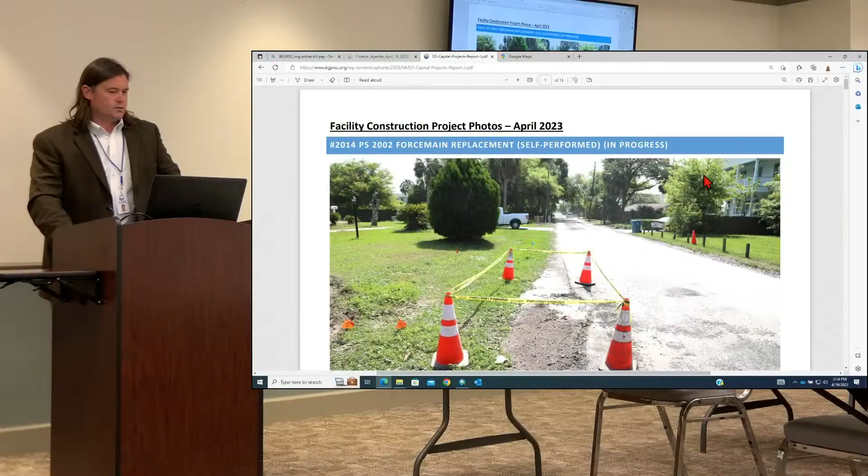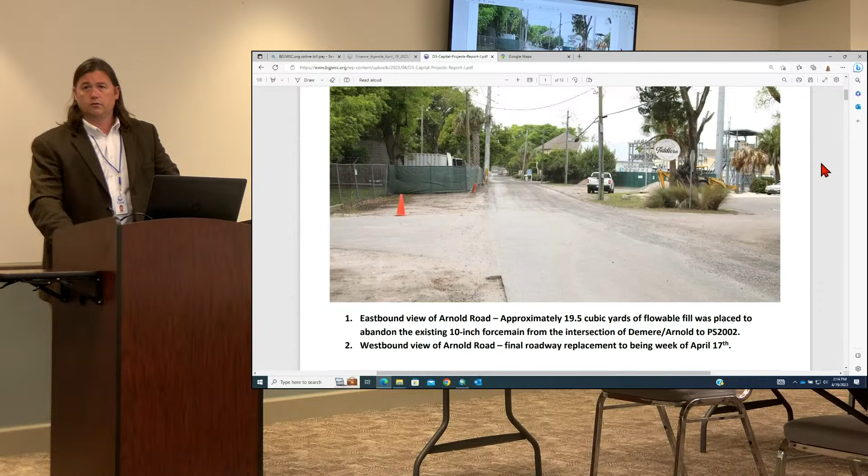Pump station 2002 force main replacement is self-performed work, with systems pumping, maintenance, and construction crews doing this work. My understanding is they got the dewatering installed and turned on yesterday, and they're digging today, or supposed to be. I haven't checked in yet.

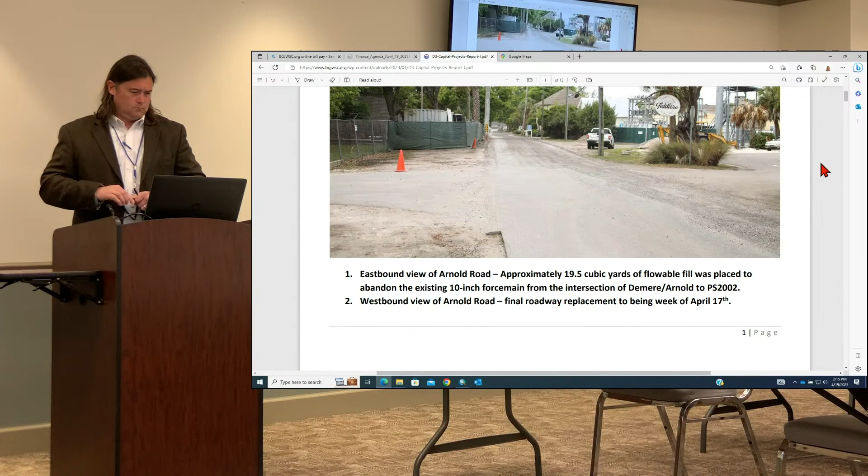They've got to excavate the fill material. They went back and did compaction testing, and it did not pass the standard set by Glynn County. So they've asked us to excavate the unsuitable soils, replace with dredge sand from Andrews Island, and recompact. They're in the process of doing that now, so paving will be in the near future.

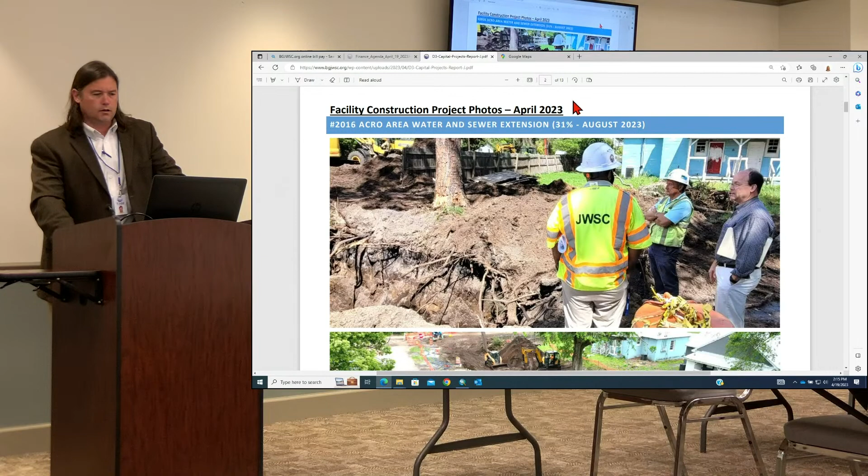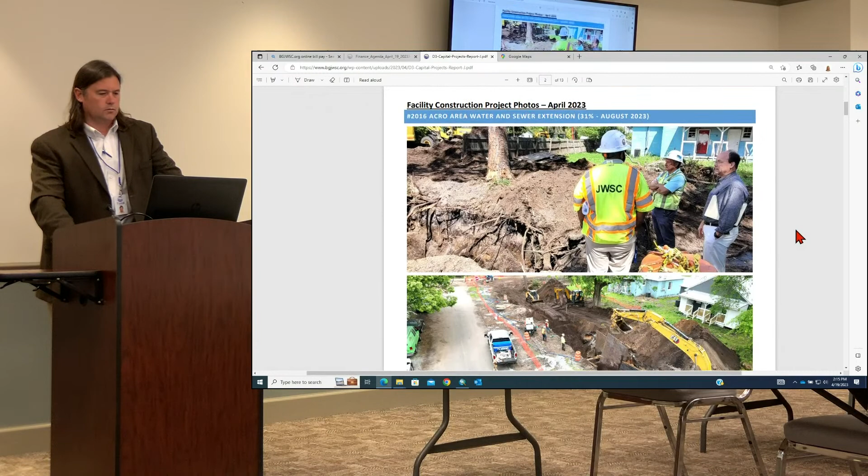Next project, Acro area water and sewer extensions. The good news is they are testing this week, doing final inspections and testing on the first segment of gravity sewer that's going to allow new customers to connect. We're looking for good results, no issues expected.

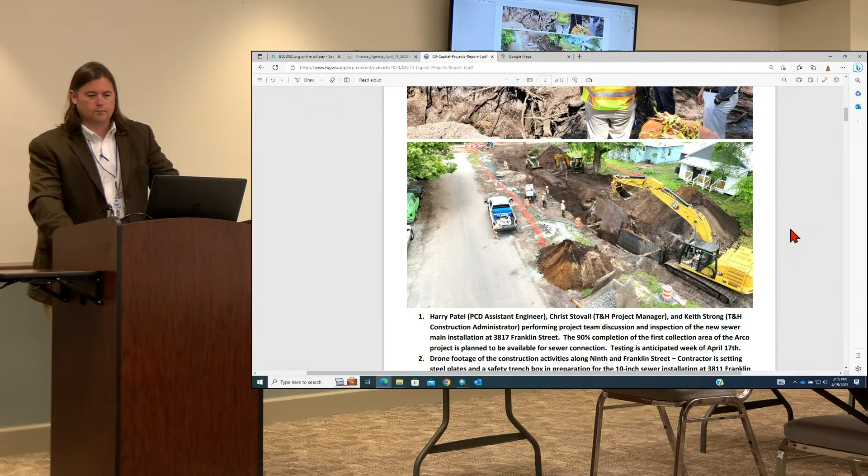Typical well pointing on much of that sewer line, pretty much all of it so far, just single well points. They're using, rather than typical 2-inch well points, 8-inch pipe slots dropped down, pulling from there with submersible dewatering pumps, which is kind of interesting. Seems to be effective, but it's a lot of water they're moving out of that work site.

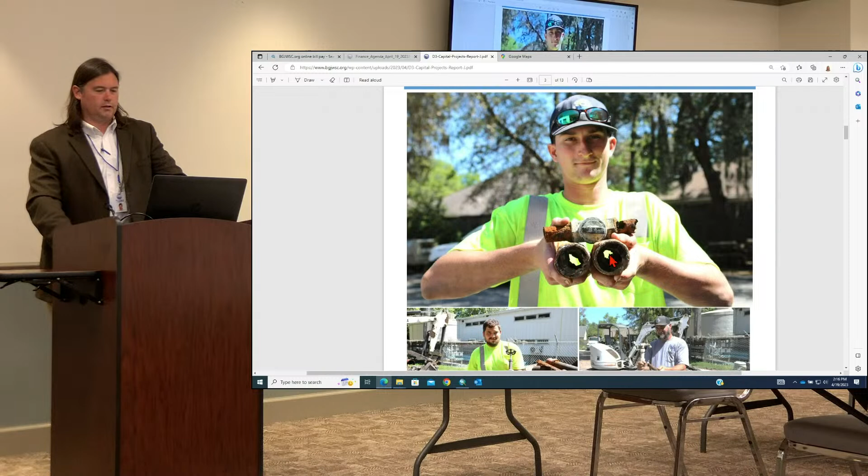Galvanized replacements, another internal self-performed project. We've got Mr. Justin Lewis, water distribution, showcasing some of the finds he made. The galvanized system pieces are pretty typical of what you find for tuberculated steel or galvanized pipes, and what's left of them after being in the ground for a number of years.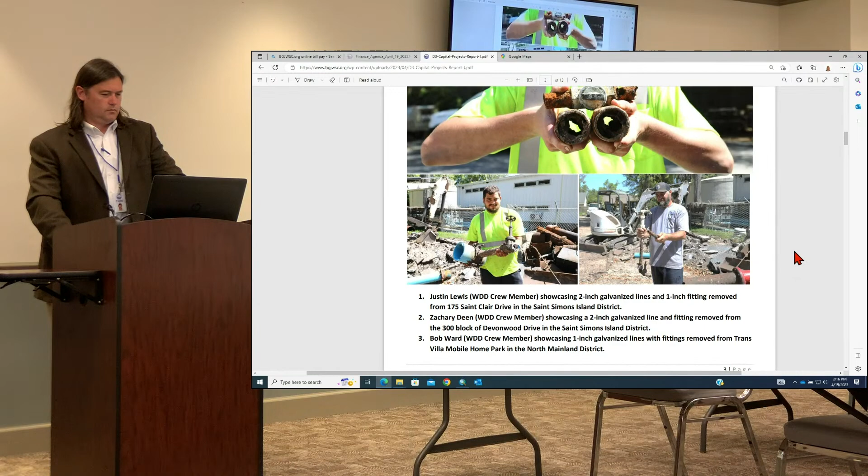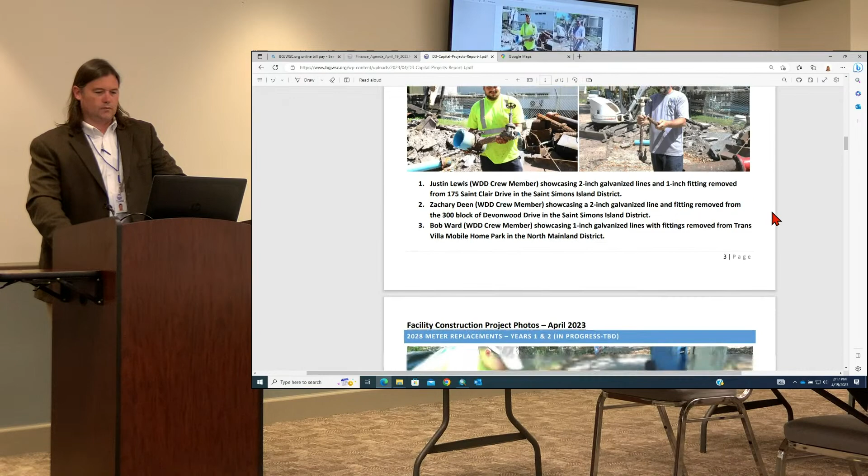Another section of galvanized tied into some PVC with a service saddle, and then a spigot assembly, again galvanized pipe, Mr. Bob Ward's holding. They keep those scrap bins pretty full. We've got one more street to do in St. Clair, and then we'll be done there. Everything else has been tied in.

They're also working in the El Dorado neighborhood—Riviera, Menendez, and a third street I forget—being replaced. Today they're working off Old Cypress Mill, installing lines in some of the neighborhoods off of there.

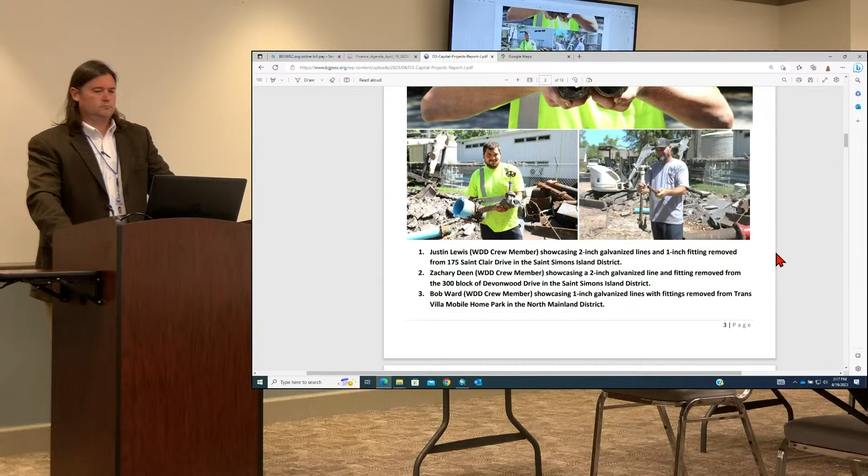Asked what percent is finished: we've done 3.5 to 4 miles of galvanized lines so far. When we originally started this, we were looking at about 35 miles of pipes, so we're probably 10% done with replacing all the galvanized. Still got a lot of work to do.

Another good project here, meter replacements, still ongoing. M&E Construction is the contractor. It's a good example of some old meter box infrastructure coming out of the ground there.

Got a little over 20,000 meters done so far, and we've been working on large meters for the last month or so. Their crews have been in and out of town, so we didn't get a lot of production last month, but we have a commitment they'll be back to full staff on our job Monday, so the install rate should go up. We have also found a few connections that were unmetered as part of this—when you replace 30,000 meters, you find a couple of things like that out of the system.

Dunbar Creek: the UV system actually came in one month early, the first thing that's come in early in three years.

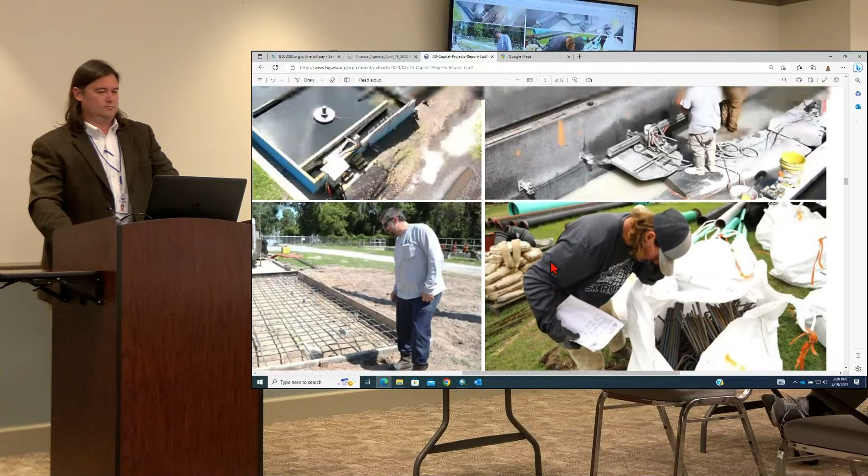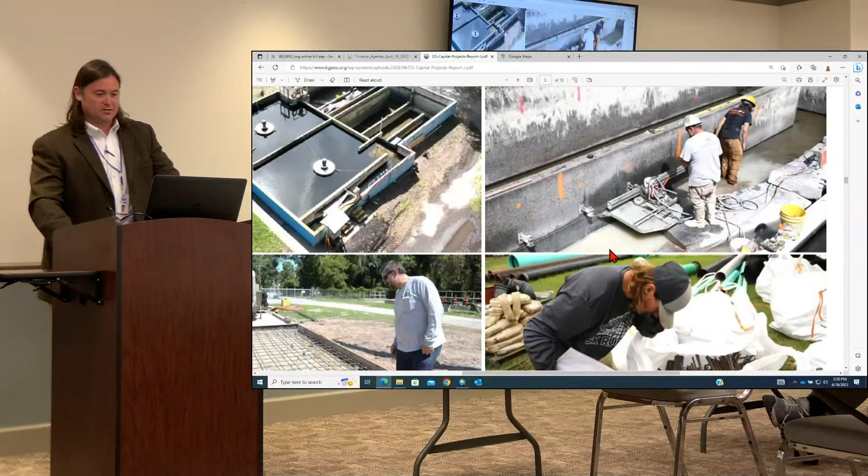Y'all never seen these big track saws and whatnot that they saw through concrete with? It's pretty cool to see. Pretty process, and that company's doing a pretty impressive job out there. Not the first time they've done work with us.

The amount of rebar that gets delivered to these sites, if you've never seen it, is an astounding amount of rebar. Every piece gets counted. That's right. Really?

All right, so another good and very visible project we've got going on is our elevated storage tank rehab at Glynn Place Mall, which if you go out there, you'll see one of the logos up there. That's a JWSC logo on one side, and on the more optimum side we're sharing the space with the college, who's going to have their logo up there pretty quickly.

It will be pointed towards the Walmart intersection, because that's the premium view. You can see the tank from the spur, but there's trees in the way, so we're going to get good visibility. We've oriented it towards that Walmart intersection.

What's the lifespan on a tower like that? Fifteen to twenty years on the tank painting job. Painting, I mean the tower itself. Oh, the tower? If properly maintained, as long as you maintain it and keep the paint, there's no reason it shouldn't last 100 years. Even if you get little pittings and holes, you can just weld over it. It's steel.

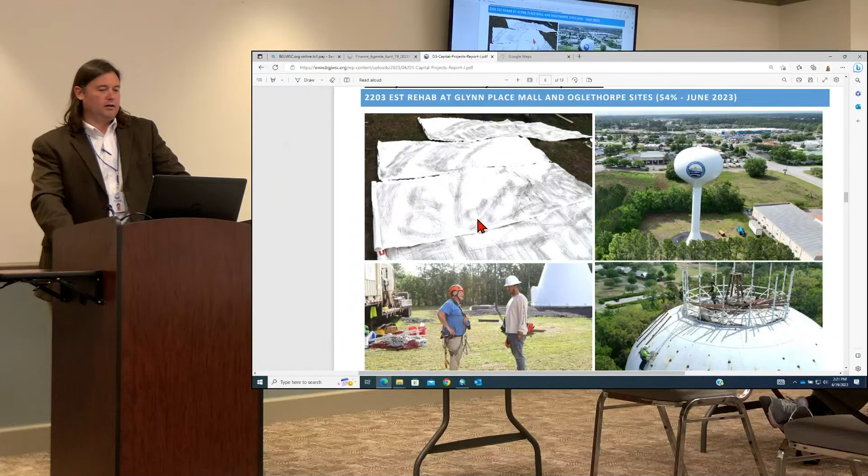Top left, you may not be able to tell what this is, but this is actually the stencil. They use Tyvek house wrap, and it's printed with little tiny holes. They basically rub paint over that, it transfers through the holes, and it gives them something to connect the dots. It's pretty cool to see how they do that, but it's done by hand, suspended in the air. I've got a lot of respect for those guys hanging off the tanks in the air.

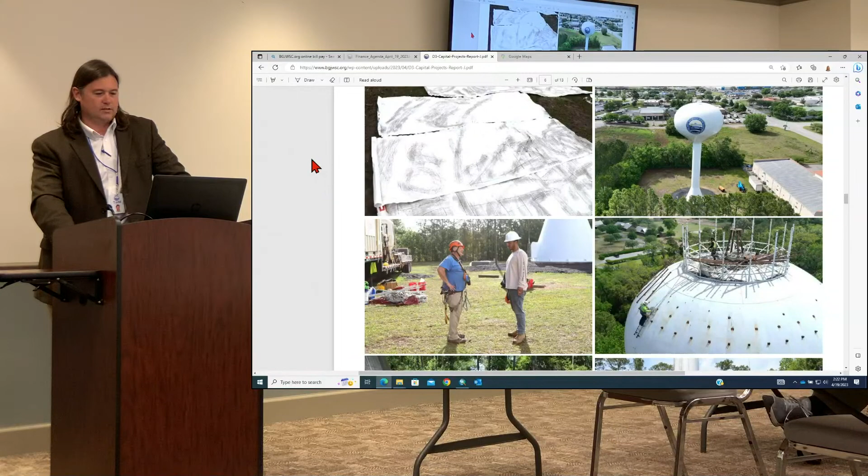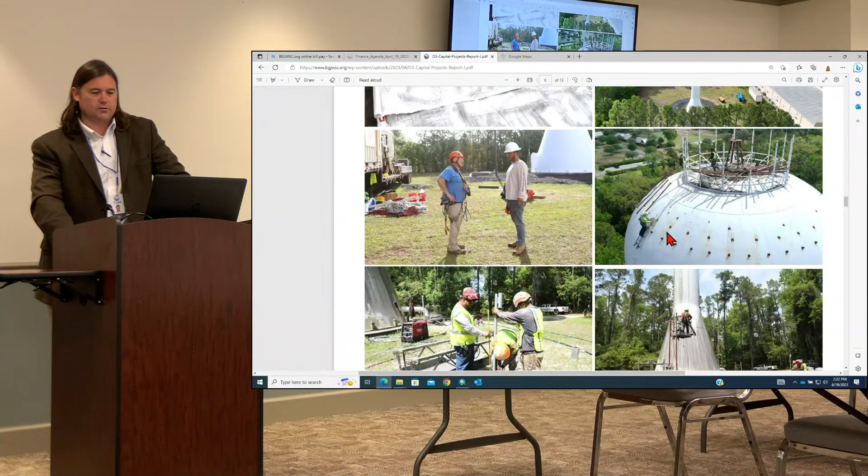Middle left, you'll see one of Chapman Technical Services' inspectors there talking with one of the contractors. Just a lot of neat stuff going on out there, like a trapeze artist situation.

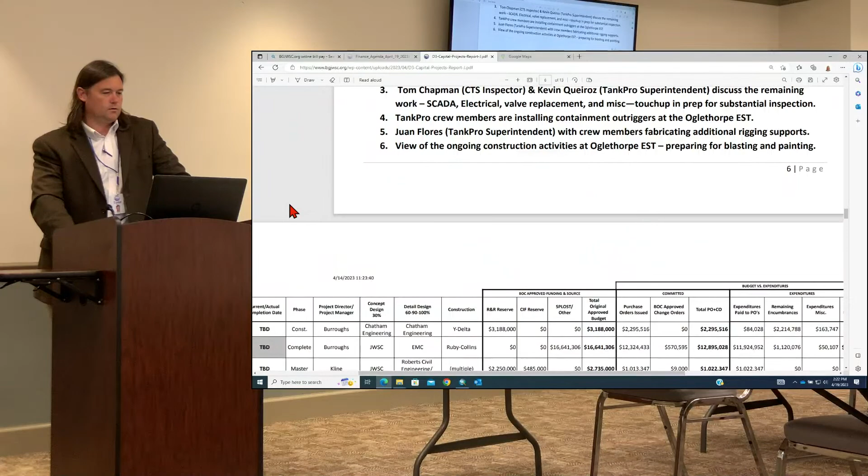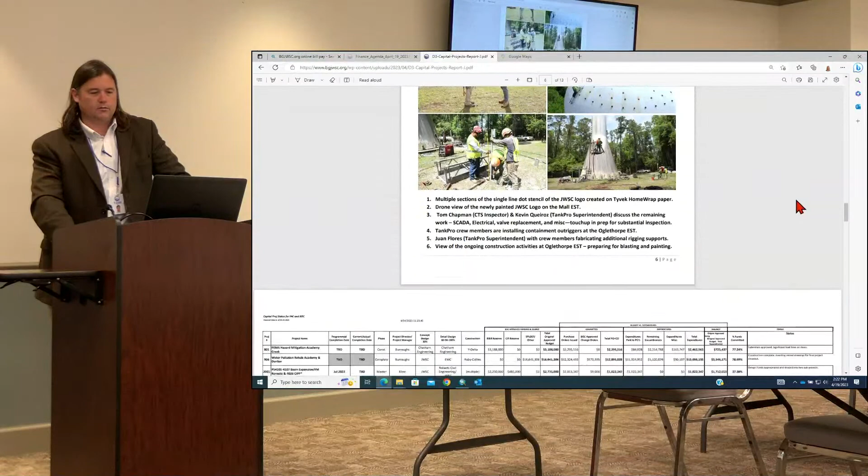That concludes the pictures and the detail of all the projects. Of course, the pictures are just the ones out in the field to some extent going on, but many more are behind the scenes in design, at different phases of concept and design. So, as always, detail for each project is over there all the way to the right on the Gantt chart.

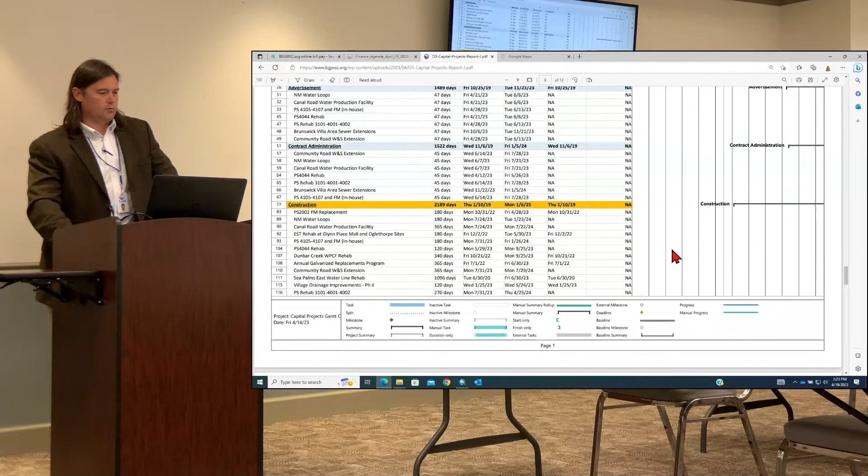We are getting very close to bidding the Highway 17 North Pump Station, and also bidding out to purchase the RAS pumps for Academy Creek in advance of the actual construction contract being let, due to lead time on those materials.

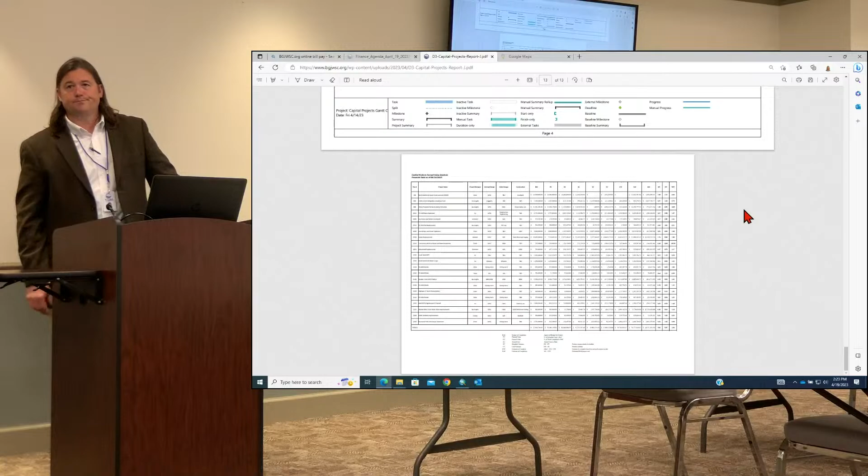All right, and of course the good old EVA sheet on the very tail end of this, and if there's any other questions. I will say we did officially complete phase 1 of the Academy Creek project. That contract has been closed out. Contractor has been paid, retainage has been paid out. We're just waiting on record drawings.